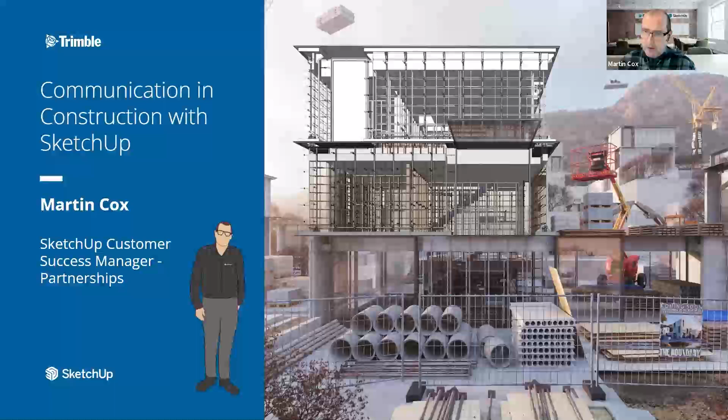So my name is Martin Cox. I'm a customer success manager for our partnerships, and the webinar we're going to be going through is really talking a lot about communication in construction using SketchUp. Now, we're going to be talking about SketchUp, we're going to be talking about other pieces of software, how we communicate with different pieces of software.

There's going to be a lot of information in this webinar. So hopefully, as we go through, it's clear. And also, I'm going to use SketchUp to show some live examples as we go through. So hopefully technology will behave and we get everything as we go through there.

So what I'll be talking about: I'll give a quick introduction. We'll talk about SketchUp, about Trimble, just really more information, what we'll be talking about in the webinar. We'll be discussing why construction is hard. There's so many factors in this, and we'll talk about that as well.

Introducing connected construction, really where we talk about why communication in construction is so important, and then how SketchUp can be a big part of this, and how SketchUp's used. We'll talk about some real life examples, and I'll show some SketchUp models, going into some more details around that communication element.

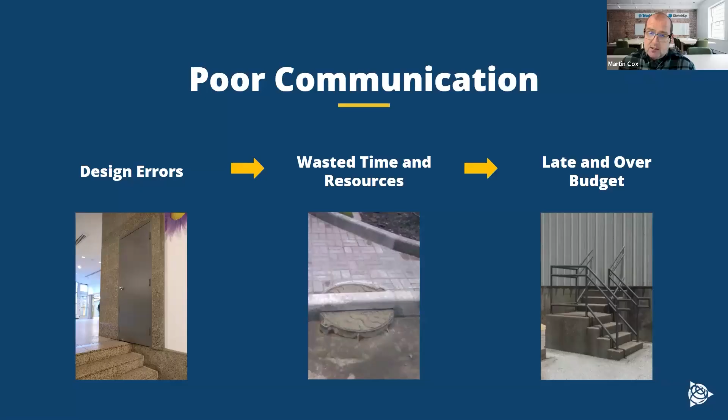So first of all, what is connected construction? Now, with connected construction, we talk about the 3 Cs. These are fundamental building blocks within the construction process that work across the entire Trimble portfolio and also other pieces of software as well. SketchUp is a true collaboration tool, and we'll certainly talk about that. So the 3 Cs in connected construction.

So we have connected. Now, this is breaking down data silos to improve interoperability and document management. The benefit to customers is that all aspects and the different phases of a construction workflow are easily shared, easily discussed, and easily understood. So everyone can work through this as well.

Then we have our content. Streamlining our workflows means that we have our library of data. It's all curated, so it can be traceable. And the benefit from this means that everyone is looking at the same thing. So somebody's not looking at an old version of a drawing and mistakes are made there, and people know where something goes, how it needs to be installed, and the equipment that you have at that time.

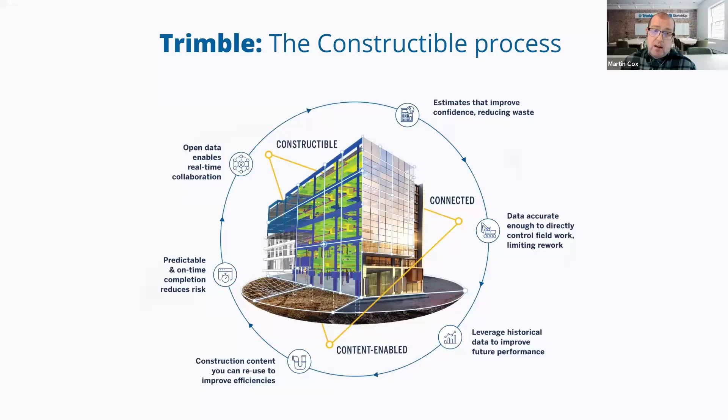So we have proven results around this. We have some huge projects that have worked in connected construction within Trimble, and we've seen a significant improvement in rework, things are executed faster in the field, there's less waste, and just simply the numbers around how many people are connected and how many models are being shared. And we're seeing real changes within that process within construction.

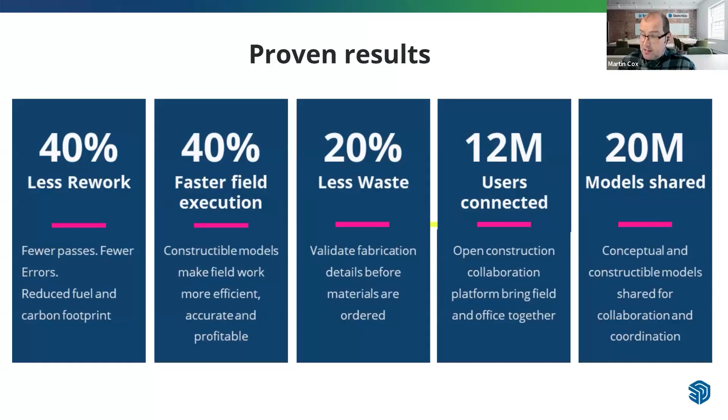Now, where SketchUp sits within this connected construction workflow, and the simple answer to this is in a lot of places. Now, I know this graphic is quite small, and I've seen that there's been some chat. We can make sure slides are shared, and as you know, the recording's going to be shared afterwards, so you'll be able to see these. But we can see this example workflow here.

Where SketchUp sits within this workflow is literally right from the beginning of creating those concept models. The planning within the models, and then we start looking at other pieces of software like AutoCAD and Revit as well. Designing around the models, developing, analyzing those models. We have other pieces of software as well, and visualizing. And then this part of iterating those different versions of the models. Yes, we go around in circles there, lots of changes, but SketchUp sits easily in there as well because we can see fast changes, sharing of those models.

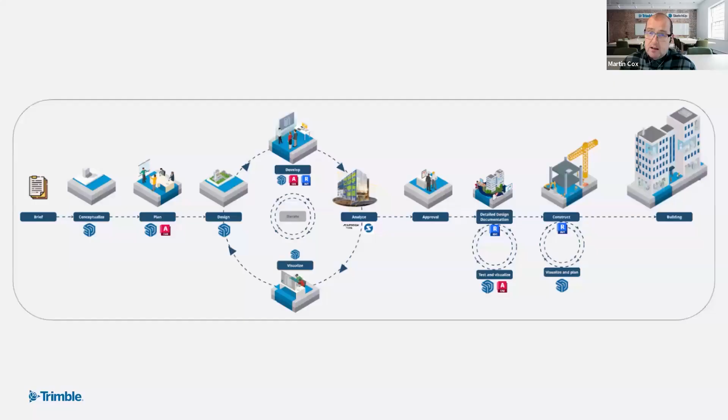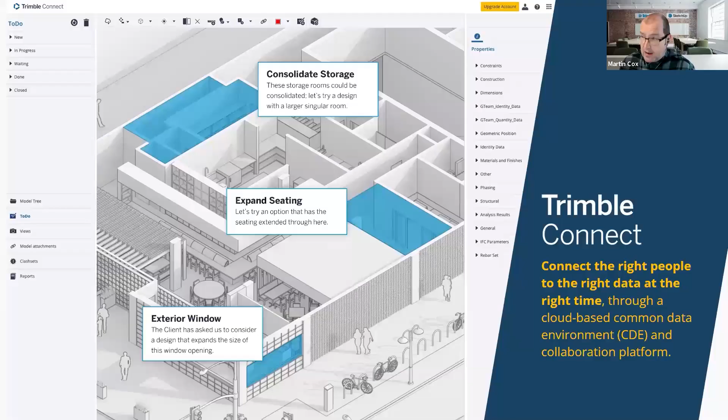And then we have the approvals of the models, full detailed design, and then again we're with Revit and AutoCAD or Tekla Structures and other Tekla Trimble software as well. And then construction phasing and helping within SketchUp the visualization of the planning of construction. So a big part around this as well. And then we end up with our building. But a key part of this is our connected construction. Trimble Connect comes with the SketchUp license, a cloud-based platform that connects the right people and the right data, so everyone has access to this.

Okay. So how does SketchUp really help communicate? So now we're really going to focus in with SketchUp. Now, it's worth mentioning that as I'm talking through the next slides here, and with our example demos as well, we're going to be looking at multiple versions of SketchUp. So there are different levels of SketchUp. We have SketchUp Go, SketchUp Pro, SketchUp Studio, and there's other ones as well. And they have different tools and capabilities.

I'm not going to go into details in this webinar about all these different versions. Best thing to do is talk to your partners, talk to your reseller, and they will find the best fit for you, depending on the workflows that you're looking at for SketchUp. So just be aware that some of the tools, depending on the version of SketchUp you have, you may not have, but I'll try and point them out as we go anyway. But yeah, your partners will be able to help with that and recommend the best fits.

So where does SketchUp sit within that communication workflow, that structure workflow? We understand where SketchUp sits. We know that the majority of users are using SketchUp for visualization. Also presenting ideas and sharing those models as well, and documenting this. And then we start looking more around that model sharing, coordination, whether it's construction sites, estimating, analysis, and then fabrication. So we can really see where the power of SketchUp sits within our different workflows.

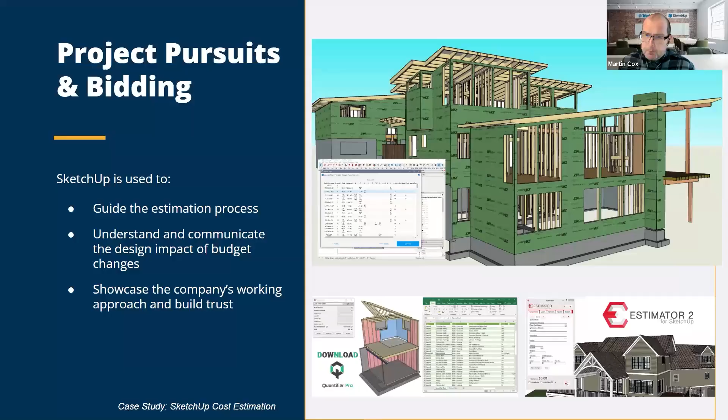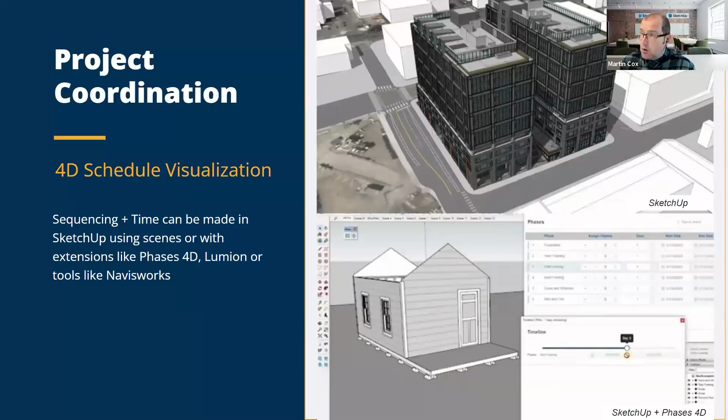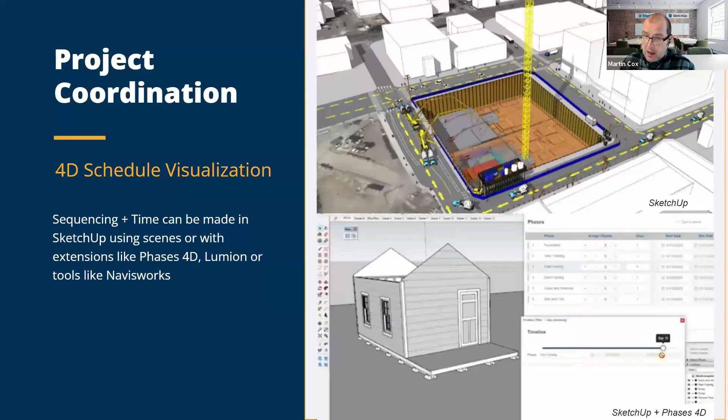There's also that project coordination - the 4D schedule visualizations. With the addition of time, we can create these 4D schedules at different levels. Basic 4D sequences can be created within a planning model to show where the site is going to be, the stages around a site, and where things are accessed. Or you can use different extensions like Phases 4D or Lumion, Navisworks, that actually create some of those schedules as well. That's one area within that coordination.

Another area of project coordination is around site logistic plans. With the complexity of construction projects, creating site logistic plans is standard practice now. Often they can be a static 2D drawing that remains the same, but with SketchUp, these plans can contain full elements around the construction, such as showing delivery routes and locations of where things are going to be.

It's great to be able to communicate the site design to a customer, saying okay, this is where your site is going to be, this is where we're going to put our equipment, this may be where you're going to lose some parking spaces - so this is where the communication comes in.

But understanding those processes also means being able to identify areas where there are potential inefficiencies, areas of concern or conflicts - like we mentioned about timings, saying while the glazing is going up, people cannot work underneath there. So you have that area of glazing, you don't bring in the team to do groundworks underneath the glazing - we can show that. SketchUp is often used in these logistic plans because of its flexibility, and because of 3D Warehouse being able to bring in, say, this is where a crane is going to be, this is where a lorry is going to be.

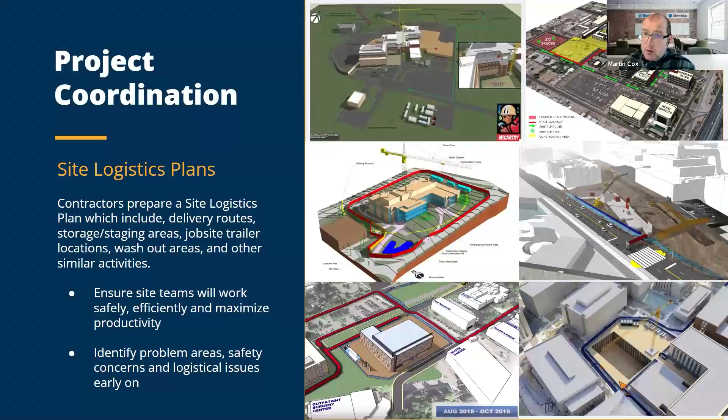Working within those detailed site logistics, you can see how clear it is with our 3D plans. We can show delivery routes, delivery locations, and storage locations, those areas as well, and it really helps with all of those things I mentioned.

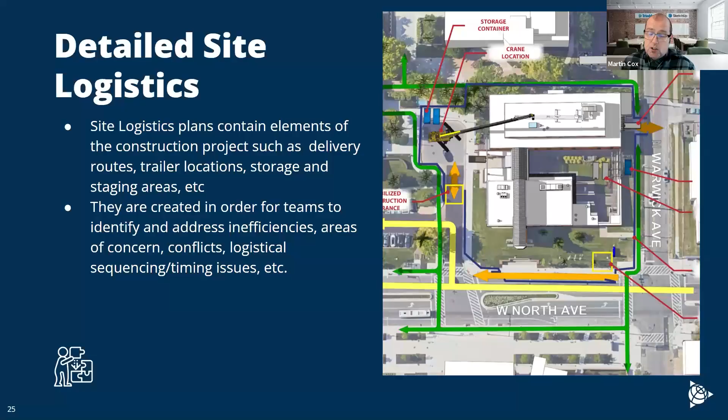So this is a huge and big part of where SketchUp sits within a lot of our construction customers. Now, something else that happens on a regular basis is construction mock-ups.

These are basically showing potential complicated areas, and construction companies spend thousands of pounds, euros, dollars - we're all over the world in this webinar - showing a physical model of how these glazing assemblies are going to go together. They're quite complicated.

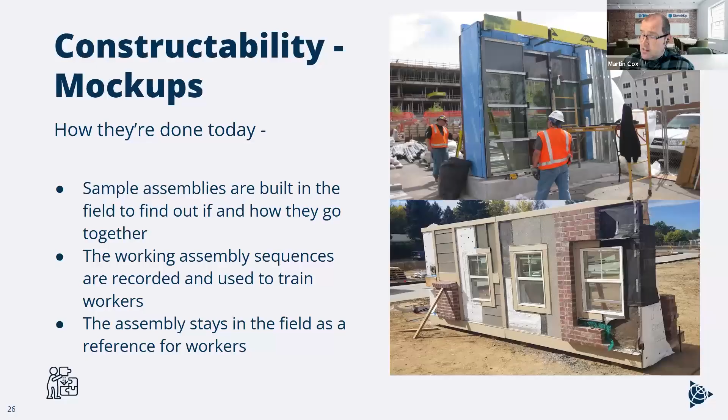The physical mock-up is usually developed before the actual assembly is performed, so the trades can learn how things are put together. That stays on site - it literally sits there so people can come over and have a look at it.

But a big part of this is creating virtual mock-ups. These are created first, even before, so they're created nice and early to assist the assembly processes. During design, models can be exploded.

They can be shown with more detail. Even with the physical models we saw, things can be hidden - they're carefully designed so that they're almost showing those layers. Whereas a virtual mock-up can explode and can be hidden.

So we can show details here that you could never make, like this example, seeing how that sits on top - detail zooming in, with cuts and crops as well.

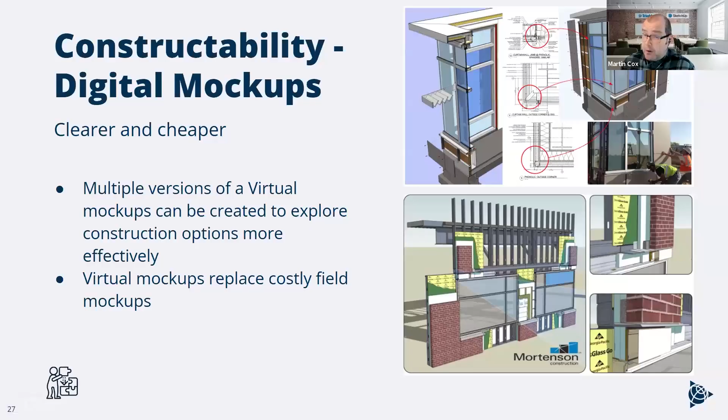And as you can imagine, these are much cheaper to make, and it can go into much more levels of detail. Those three-dimensional details can really show the clarity, so it's more clearly understood on the job site.

And these are all real examples - examples of where we've worked with customers around the world. Okay, so let's get into some actual examples here. Let's start having a look at SketchUp.

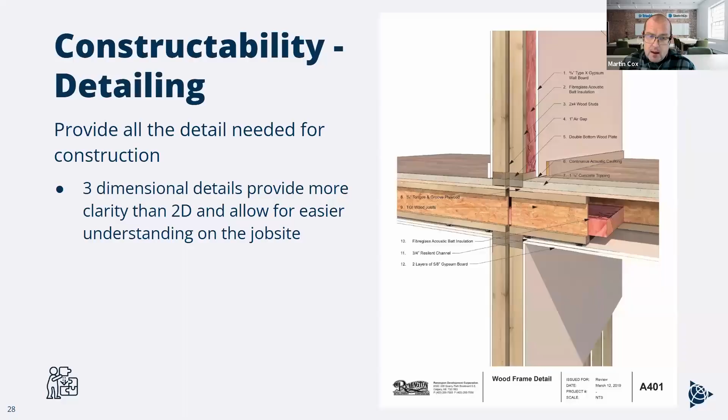Within our workflow and the next example, I'm going to show a video here and talk through these different options. I want to walk you through showing how some of this integration happens. We're looking at using Connect here, using SketchUp right from the beginning of a workflow and seeing how that expands all the way through - from setting up the site, then introducing other tools and seeing how they work within this workflow.

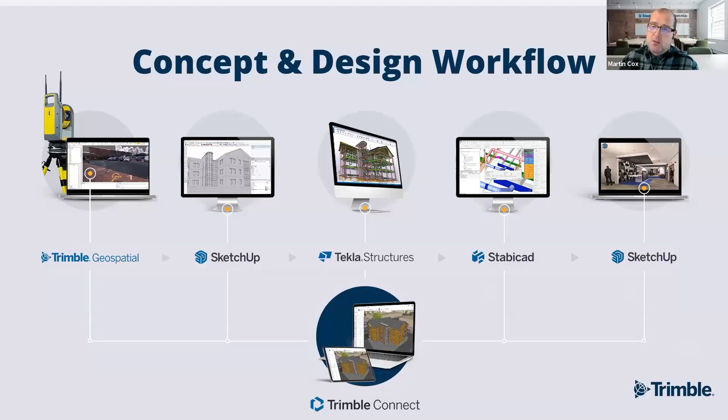So this is a video that I am going to talk through. I may pause it sometimes - I will be completely honest, I don't believe in trying to trick anyone with video editing. The reason this is a video is we're showing a huge amount of information, different tools that I'd be swapping between, and it's much easier using this option.

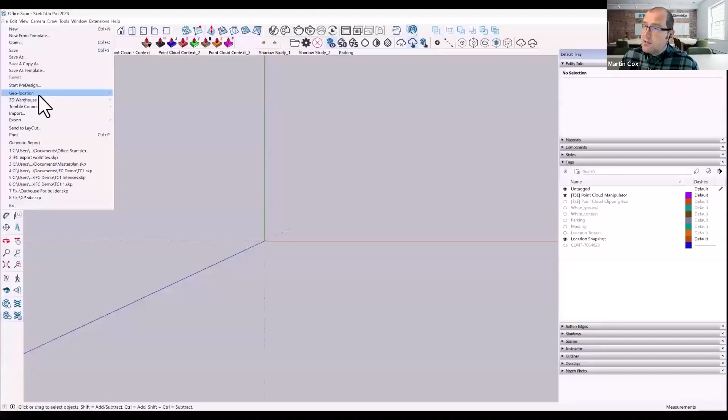So starting right at the beginning, we'll just start this video here. We can literally import the site information using Add Location in SketchUp, so it will be a geolocated model. Using the geolocation Add Location, we can import map data straight away, bringing in this map data for our model. We then have our site plan, and this does contain the tags regarding the terrain - it's not overly bumpy in this area, but it does show that terrain for the model.

This means we can then quickly create a plan just using some quick 3D models. We'll jump to a model here saying okay, this is how our site looks with some models around it. So this gives us an idea - we can look at shadows, we can look at how things are going to be, models and buildings that will be in place, which will help with crane positioning as well.

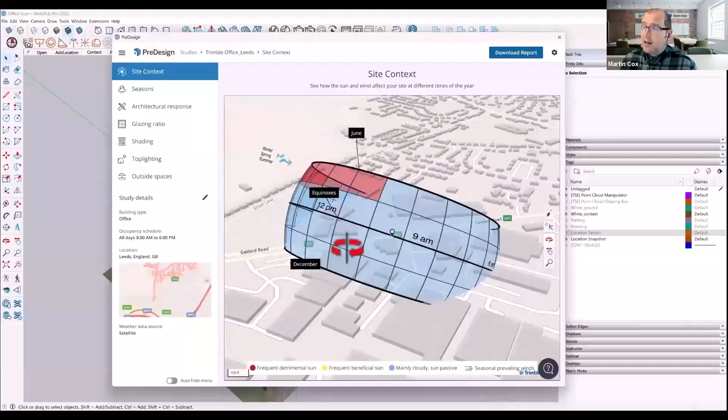Using a tool such as SketchUp Pre-Design, because our model is geolocated, we can use Pre-Design to actually look at sun and weather data, which helps with the construction process, because we can look at historical weather data to see the type of light we're going to get, how much rain we get, and wind conditions for cranes as well. So it gives us a lot of information here. It also goes further into architecture, but we're not going to look at that one.

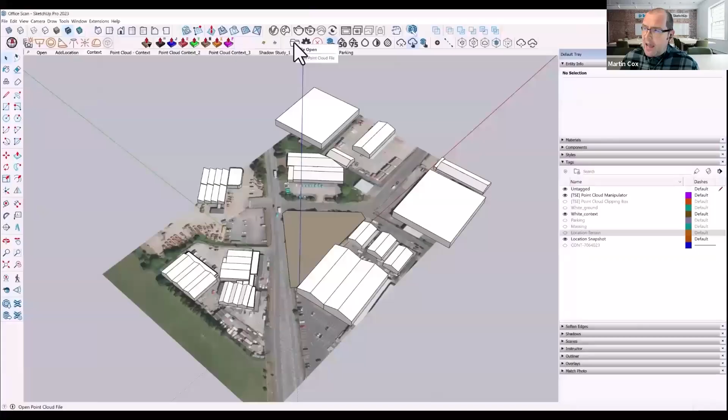Using a scan of the site, so opening this with Scan Essentials, and this is in the different versions of SketchUp. So if you have SketchUp Pro, you won't have Scan Essentials, but we can actually import a point cloud of our site.

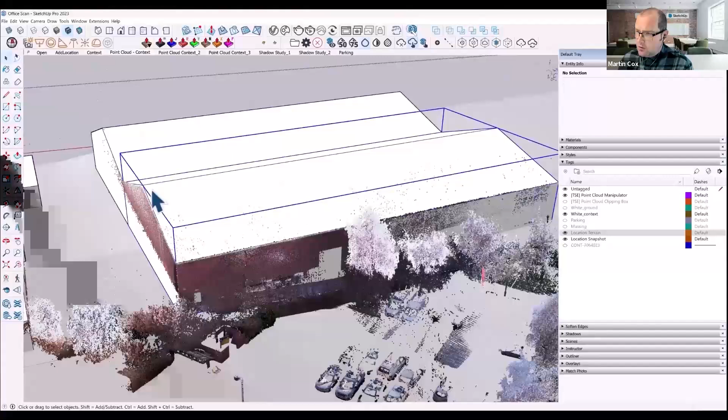So we have a real life scan here using Trimble scanning hardware, and we can actually see the site now with regard to those building conditions around.

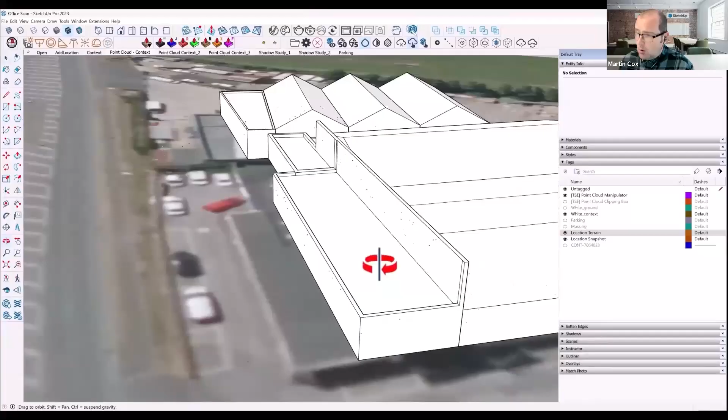We can really start analyzing it and making sure we get these in the right position. Again, particularly important for access and machinery, because we need to know about potential overhangs on site. So we can see here, actually, there's a little bit of a roof that we've possibly modeled a bit lower.

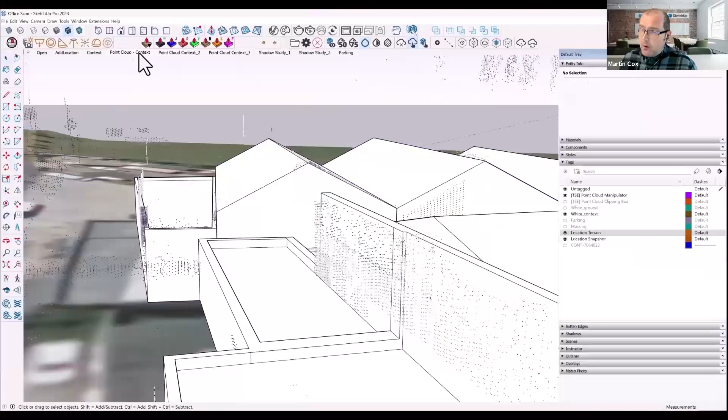So using the SketchUp tools there, we can easily adjust that roof so it fits in with our point cloud. Now, the point cloud is a great reference there, and of course we've got our point cloud available.

It means that we can see trees. It means that we can see, like I said, particularly with deliveries and access around there as well, so we can make sure we're aware of those trees.

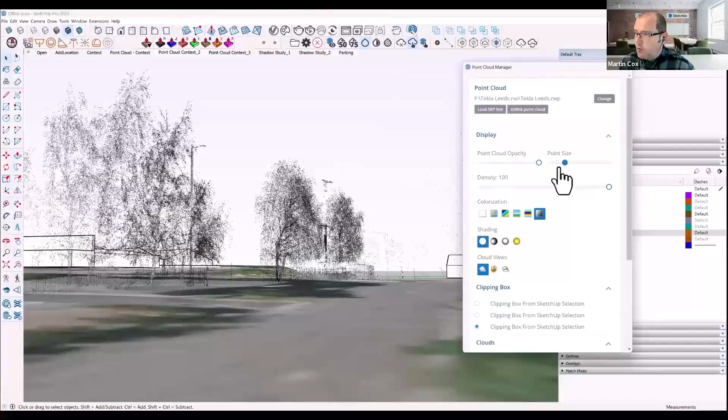But there are a number of other tools within Scan Essentials where we can show things clearer. We can change the point size of our point cloud, but we can also analyze the model, so we can compare the point cloud to our SketchUp model.

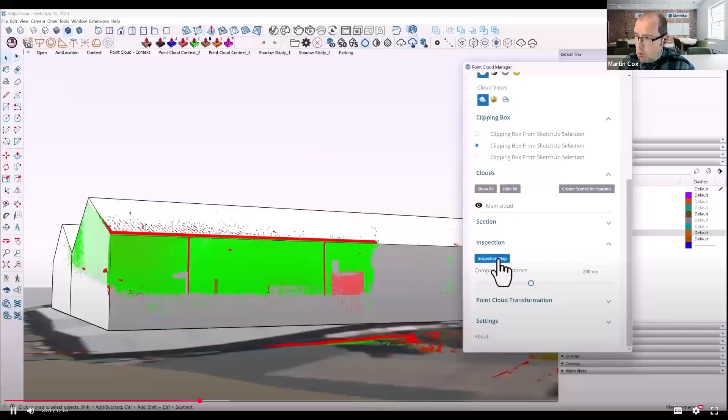So what we're showing here is that using the inspection tool within Scan Essentials, we can actually show if our model is correct. And on here it says 200 millimeters, so that little red area means that our model isn't quite right with the inspection there. But there's a lot of information.

Then we have our site. Using SketchUp, we can now create our concept design for a model. So at the beginning, we're not thinking about how we're actually going to build this. This isn't our full constructible model. This is showing some ideas.

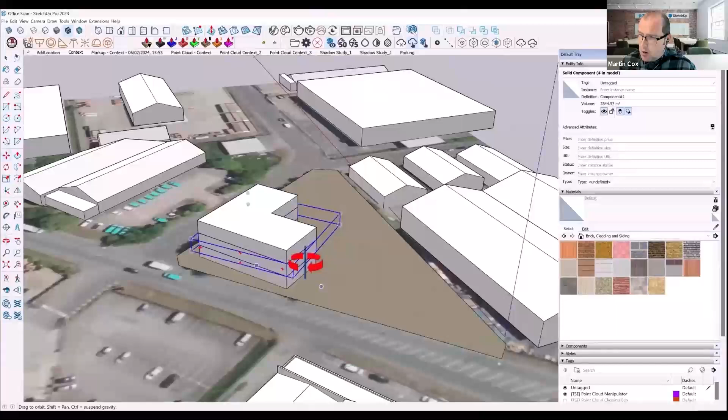So this is a video here showing how quick and easy it can be for SketchUp to create a model to show visually for people, saying, okay, this is our site, this is our plan. What do we think about the idea of the model here?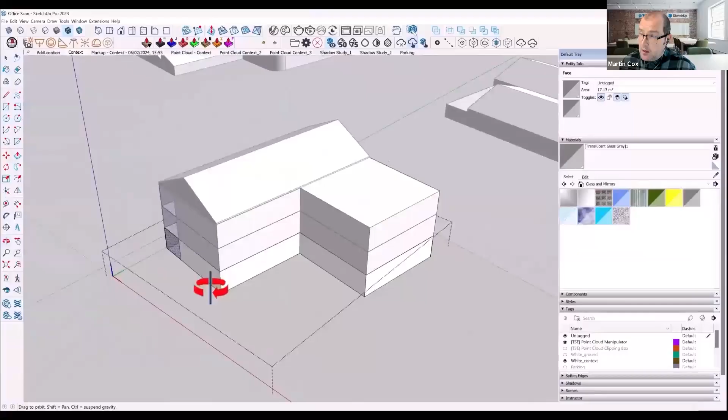We can create simple block models using components. So each of those floors is its own component, so we edit one, it edits all of them.

And we can then say, well, actually, let's put some glazing on the corner here. Let's put some of those brick materials on. And we can place our roof how we want it.

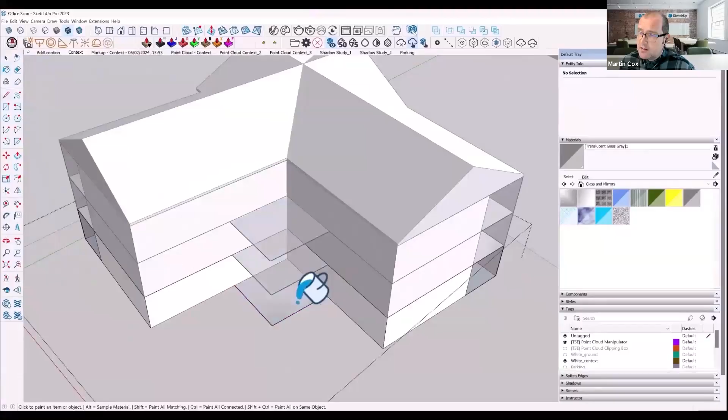Again, just think about how quick and easy it is that we're doing this, but for our customers to be able to say, okay, is this what you're thinking? Let's have a look at our site here. And is this the type of thing you were looking at? So being this fast, this easy to do is tremendously powerful.

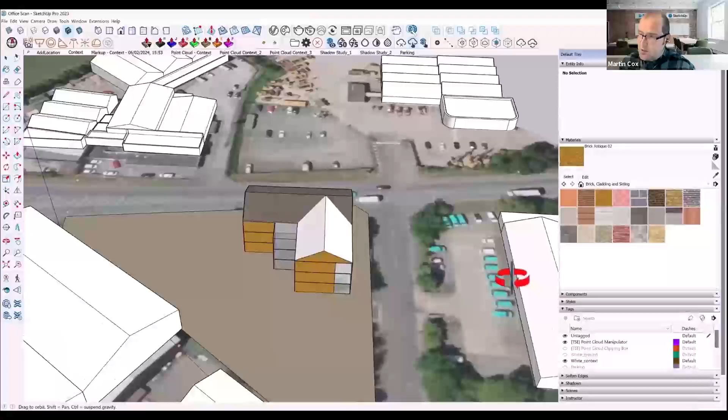And just creating those simple models is great. And then within that planning, we can start thinking about our site there. So we're just finishing up here, combining that with our point cloud. We can see how it sits within existing trees, basically the existing site that is actually there.

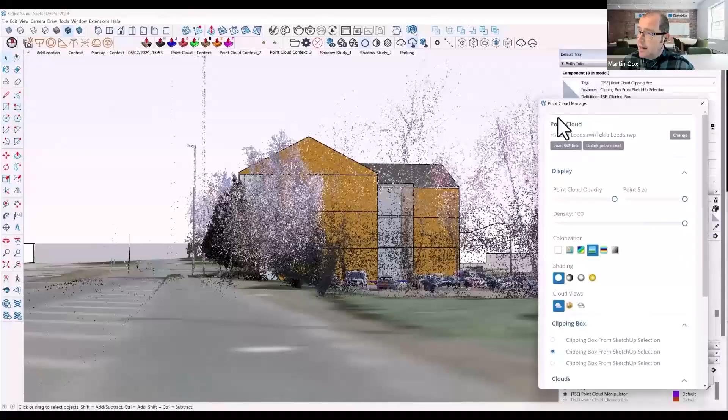With that scan, we can incorporate that. So we need to be aware of those trees, particularly with construction. It's like, right, well, we're not going to put a crane there. So it's being aware of our environment.

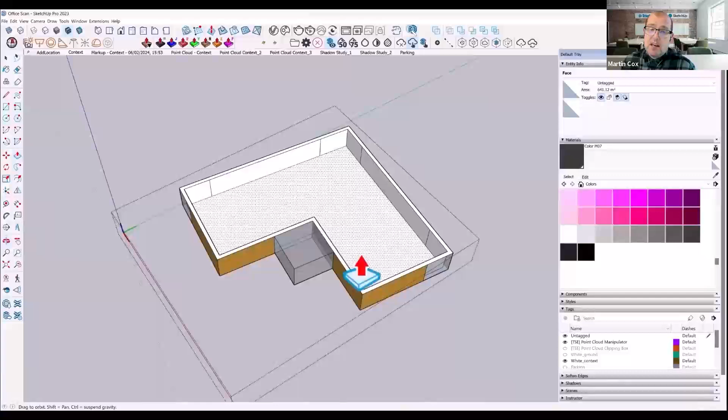And we can also start thinking about that on the interior as well. So it basically takes our model and then those iterations around the model, making sure that we have those.

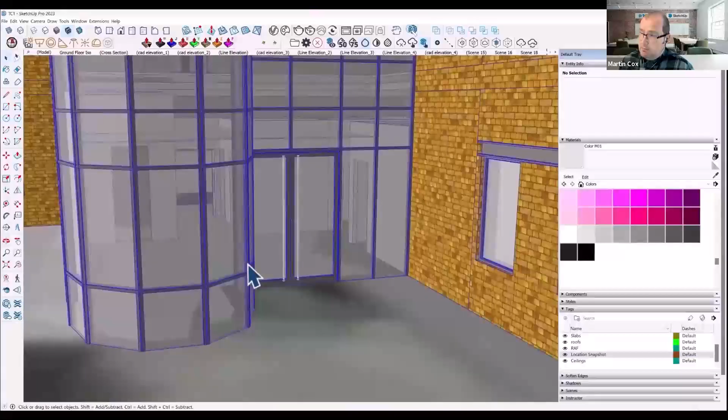So we've got a little further with this. We've added some logos, a little bit more glazing detail. But then bringing that on site, again, just being able to show the details, we can really start saying how it's going to look, with this glazing detail going to be made around the staircase, and a little bit more information about the interior of the buildings.

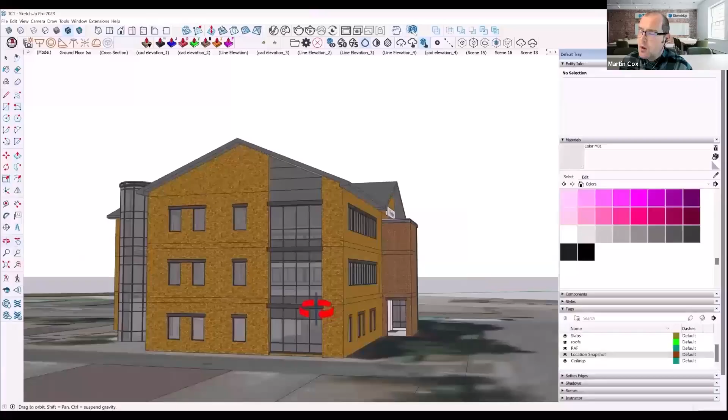So now we're moving into having an architectural model. But taking this, we can again focus on communication around that. We start having our model, we can start putting this into Trimble Connect. We can look at this and then say, okay, well, using the different tools in SketchUp, we can actually have our line elevation models and create our information packs to say, in LayOut, show the drawings and capabilities around here.

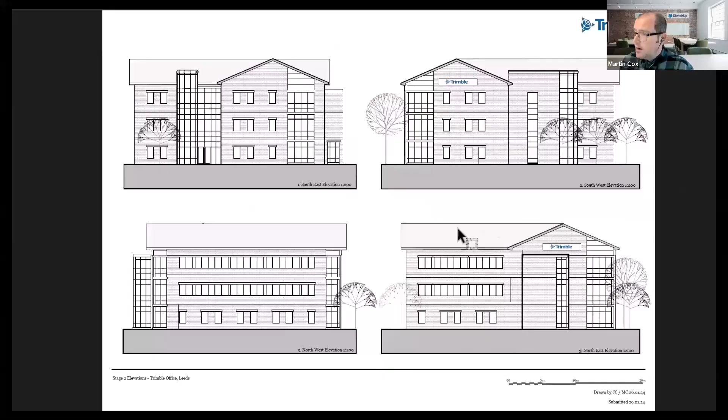So, we're exporting this to LayOut, Trimble Connect in this instance to start with, but then within LayOut, we can have our drawings and at least show people, yep, this is how your model is going to sit. This is the intention of our training rooms, just an idea of how it's going to look. But then we can take it even further with connected construction.

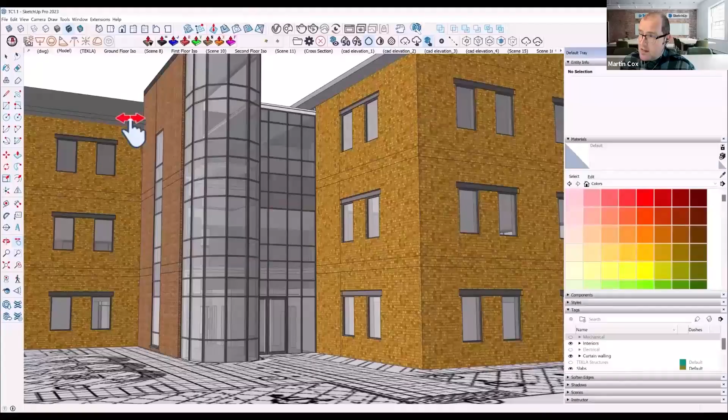So working in SketchUp here at the moment. Inside Trimble Connect, we have the structural models. We have the MEP models, which are the electrical and plumbing models. So, mechanical, electrical and plumbing. So, we have all of the models within Connect. Now, the great thing about this is once they're in Connect, we can then use these within SketchUp.

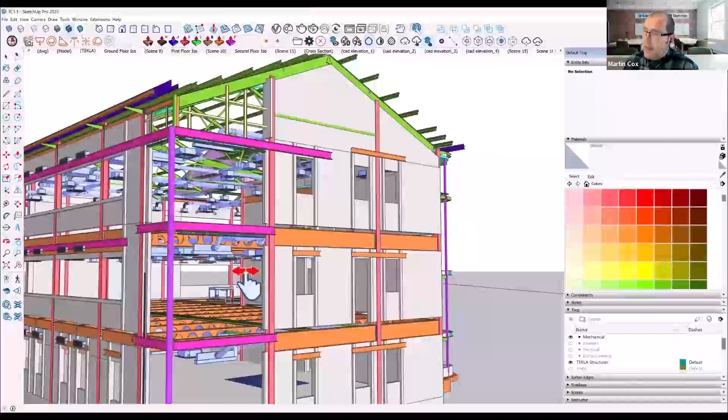So we've imported the Tekla Structures model in SketchUp here, and we can see how that Tekla model looks. But we've also imported the MEP model in here, so we can look at the mechanicals around our ductwork and piping. So we've got our HVAC equipment there. And now we've got our electrical equipment. We can see where actual plug sockets are going to be. And these are real life positions within our model.

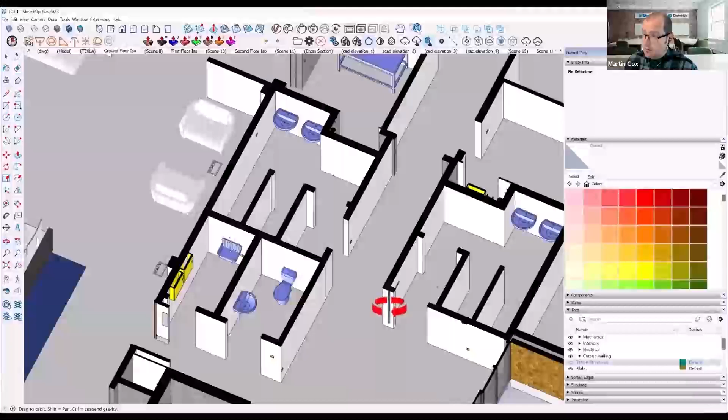So looking at the model now within our architectural model in SketchUp, we can see those correct locations of plumbing. These bathroom accessories aren't from 3D Warehouse. These are actually from the MEP model, which is where they're going to be. The yellow parts, these are the electrical models. So we can see where light sockets, plug sockets, smoke detectors are going to be within the site. So these are the actual locations.

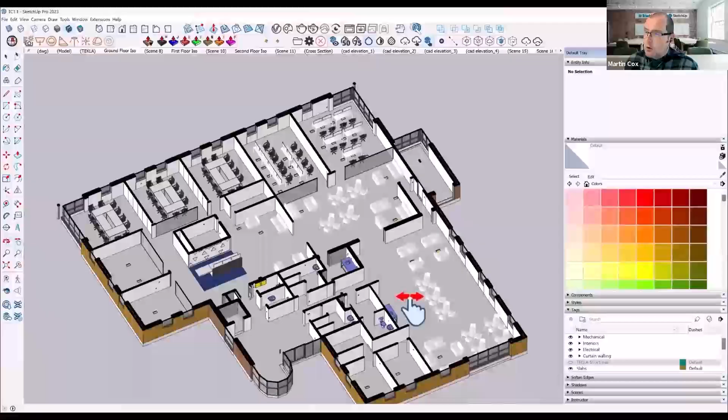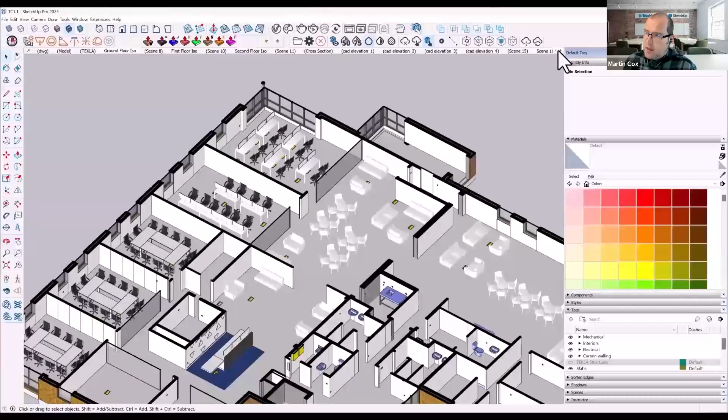So for our training suite that we have in the corner here, we can see those plug sockets in the floor. Are they in the correct locations? So, we have that information. We can see that they're going to be in the right place. Now, this works on multiple things. We can see that we're going to have the plug sockets. This is something we've worked with hospitals on, they really like this because they need to see access around certain things.

But the good thing about this is we've got a design model around here for our reception, but actually that floating light box is sitting directly over the top of an air conditioning unit. So, that's something that needs to be looked at. But within our model, we can actually see there's some exposed steelwork there. It's like, right, yep, we're going to need to box that in. So, we can quickly highlight that.

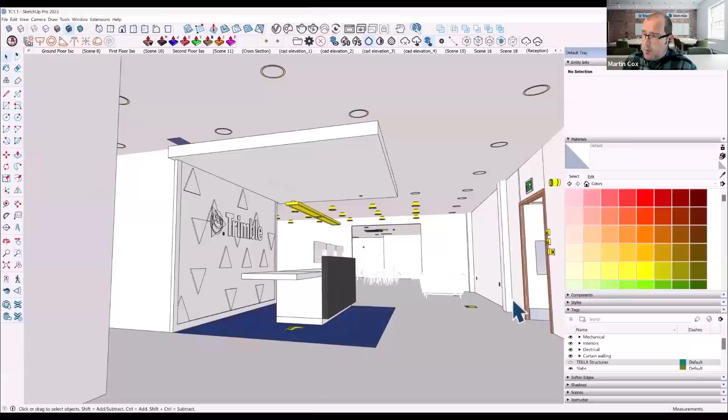In Trimble Connect, we can put that as an information request and say, look, we need to box this in. But we can then also look around everything within there to say, yep, we're making sure we've got all our sockets and information as we go through. And the great thing is because we've got this level of detail model here, we can then actually bring this into V-Ray for SketchUp.

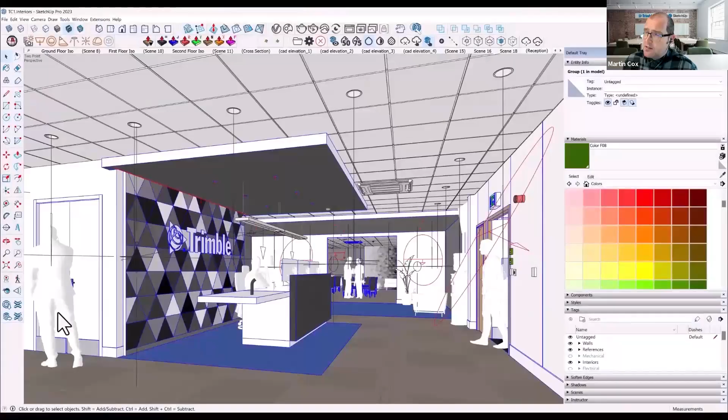So again, in versions of SketchUp, we have V-Ray included, and all of these little lines and circles are actually light information for V-Ray, so we can do a full render to show how it's going to look realistically. So we've got our lighting here. We can see that in this instance, the air conditioning unit has been moved. So we retain that light part there. It's all been boxed in, but we actually have those switches and the fire detectors within our render. So, this is a real life render within our reception.

This can also be useful externally as well, because you're rendering everything. So, we're highlighting here that we've got all of the MEP equipment and the HVAC equipment appearing in our model. When we communicate that, we can show the lighting information. So we've got that lighting detail up the wall on the internals there. But even little details like there's some plant on the roof there. This is something that often catches people out. It's like, oh, I didn't know there was going to be a large unit on the roof.

So actually having this connected construction information shows that model all the way through. And we can see our steelwork through the glazing and that plant equipment on the roof.

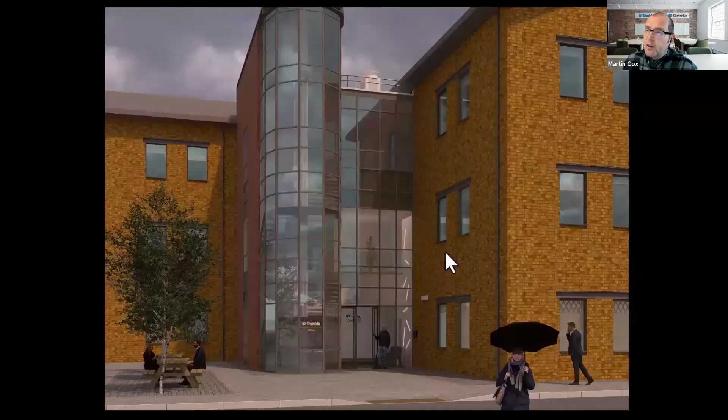And also this model was for Leeds. So of course they're showing somebody with an umbrella, because we're up north a little bit there. So we have that, but this one's sunny there, but we can show those existing trees as part of the rendering. And again, some of that electrical equipment, the ducting above the windows.

Okay. So as you can see, that's a lot of information that we showed there. We looked at Trimble Connect. We looked at Tekla Structures. We looked at Trimble scanning. We looked at MEP, all around the SketchUp model. So our SketchUp model was there all the way through.

And there's other elements, and I just saw a question come in around that air conditioning unit being hidden. In Trimble Connect, there is actually a conflict option. So it will show where models are actually hitting, and there are conflicts within Trimble Connect.

Okay, so I'm going to have a look through here. We're not having a look at that one again. I want to go into SketchUp now. I know we're coming up on time, and I want to make sure there is time for questions. So I'm going to be pretty quick here, showing some of those features in a little bit more detail in SketchUp. So the first one I'm going to show is SketchUp Scan Essentials.

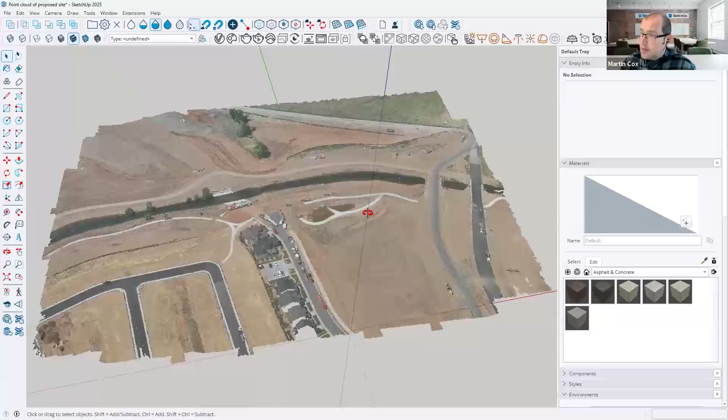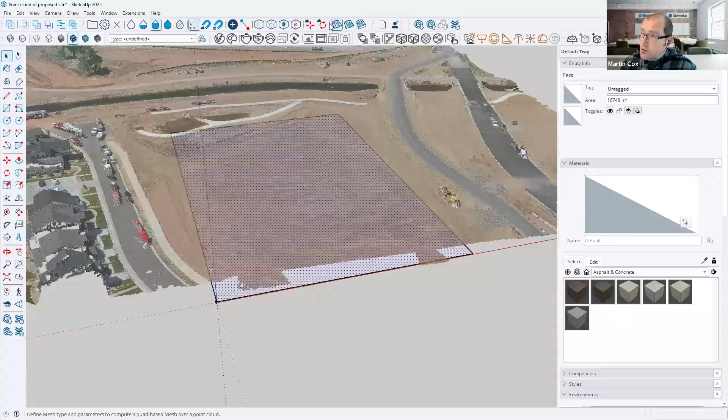So this is my scanned model here, and this is quite a large scan from a drone of a potential site. And the good thing is, using some of those tools, this isn't just a dummy model. I can actually take my site and quickly add a rectangle of the area that we're going to be constructing, select that square I've just drawn, and using the tools within Scan Essentials, I can create a ground mesh. This creates a full surface of that particular area that I can then work with in SketchUp.

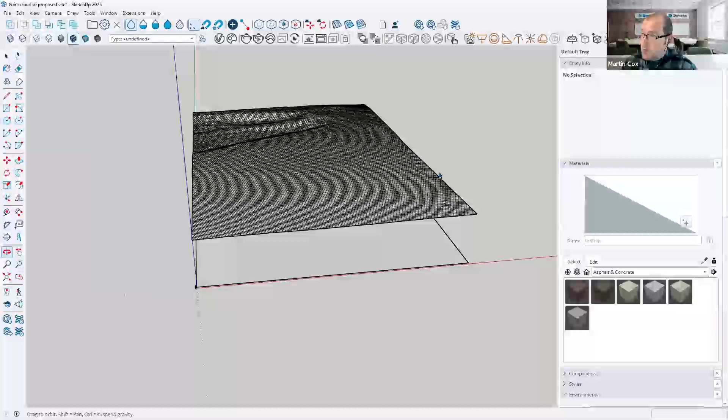So I've now got my ground mesh. If I just hide that point cloud, I can see I've now got that ground mesh that I can work with. I can select my ground mesh and turn that into a solid as well. Again, these are in the Scan Essentials tools. So we can see we have that model there to work with. Now, there are other things we can do. We can cut out the area that we're going to be working, and you can actually analyze the area to see how much soil movement there's going to be.

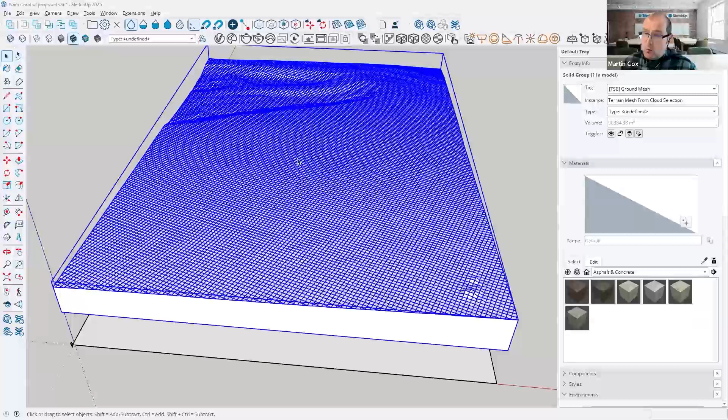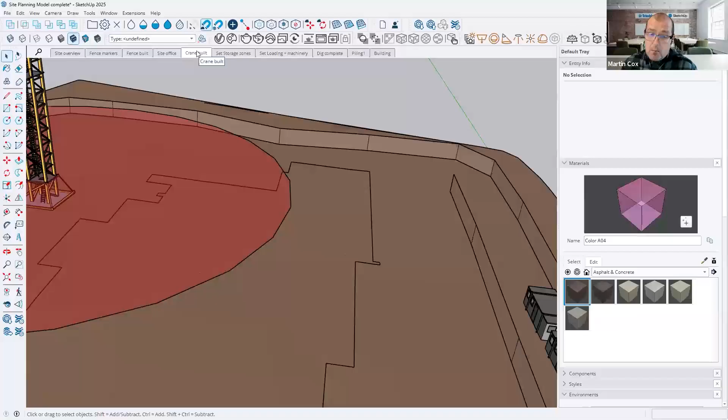But within our site planning model here, I've got that area, the solid, I've sketched on the area, and we can go through step by step to say, okay, this is where the fence markers need to be for the site, the site office using models from the 3D Warehouse, and the crane position of our model.

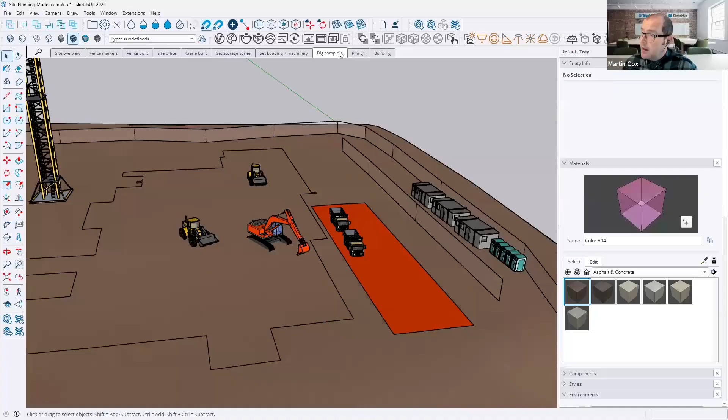The storage zones that we can specify to say this is where our materials are going to be stored. The loading areas, using our 3D Warehouse models, of where the machinery is going to be. And we can even start putting a little more information in, such as the dig that we're going to have there. And using a Tekla Structures model, we can show the building. So this is a simple example, taking our Scan Essentials site model and bringing that through.

Now, if I go back to our dig on this one, another example of where SketchUp is used quite a lot is showing where health and safety equipment is needed. So that's a big part there as well.

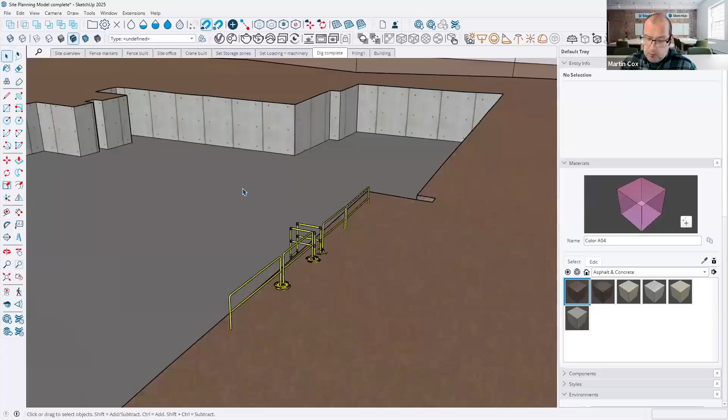Okay. Now I'm going to show a slightly more detailed model, as an example of how we can take this a little bit further. Now, this is a great looking model. Already it looks like I'm looking at a render, but we're using the new SketchUp 2025 environment and materials. So we can see that's how the model looks in that instance.

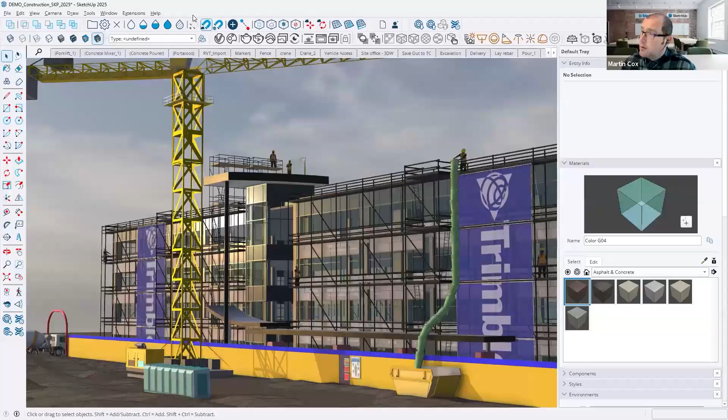Now, I'm going to go right back to the beginning here, because I saw a question come in around working with and collaborating with other models. So what we've got here is a Revit import. This is using the Revit Importer that we have in SketchUp, again in different versions of SketchUp. So we have the Revit there.

So we've got our model, and we can then have a look at that site, using our overlays here within our styles. The styles that we set up here, we can set those and set the edits and have our watermark over the top. So this is how this is done. A lot of people think, how are we doing that? But that's a PNG watermark over the top.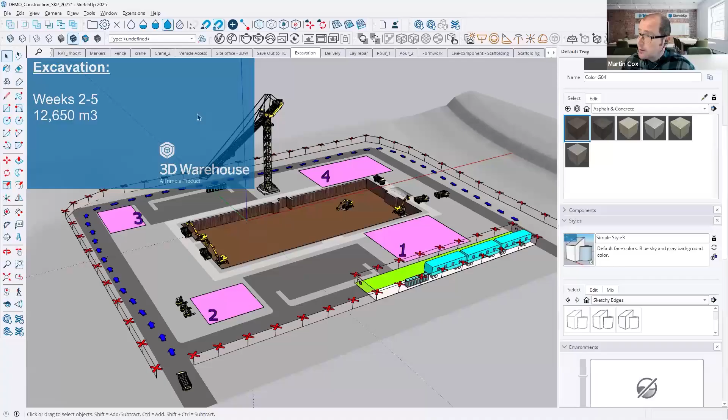So we have our excavation of our site. We look at our loading zones. And then we can really look at the deliveries. We can control with the arrows specifying direction of movement around the site. Now, using scenes and different transitions here, we can start creating some quite cool effects to say, okay, the rebar is going to be laid in that week.

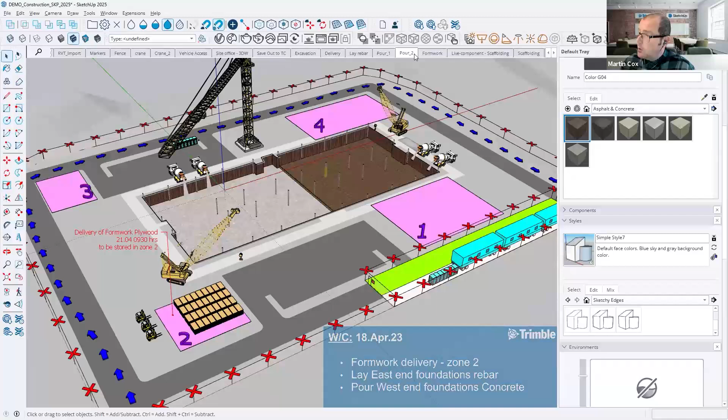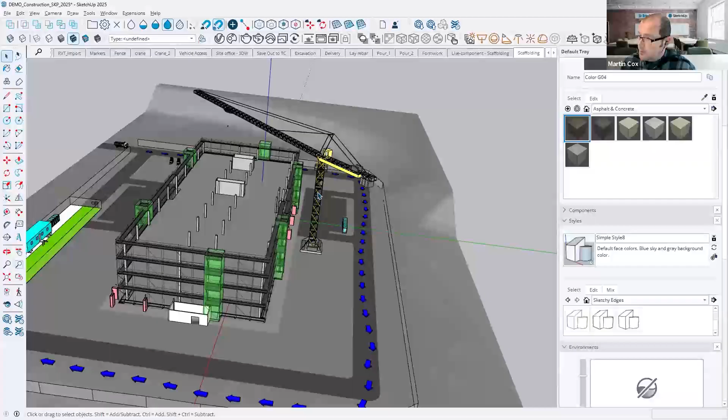Then we start doing the pour, so more rebar. We have the cement pour there. Then we've got the second part of the pour, and lovely fun little details of the concrete coming out of the trucks there. The formwork's going to go in within our pour, and then we start putting up our scaffolding, and we can have our scaffolding zones, and label those to say that these are the staircases that we're going to be having.

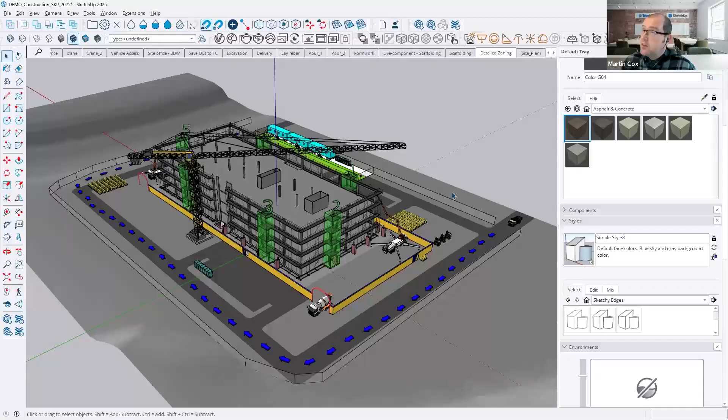Labeling those staircases with our detailed zoning, it's simply being able to say staircase 3 is going to be out of action at these particular times. And we're still using the Revit model. Because we're using the Revit importer, it recognizes the layers, so we can switch things off, such as walls and glazing there as well.

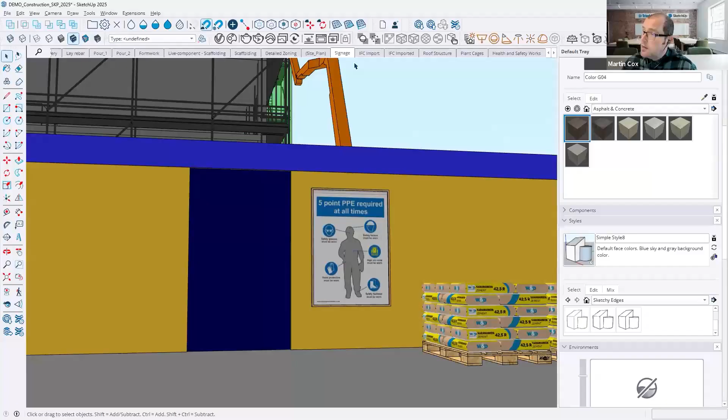We can start really sharing site plans around this, and people can start marking those. The signage that's going to be required on site, we can specify those requirements for sites. Within Trimble Connect, you can link PDFs to those particular signs and say, this is what we need to be loading. We can import more IFC files.

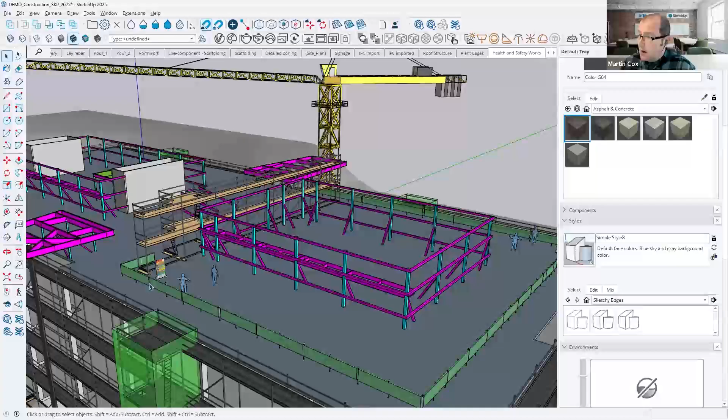This time we're importing a Tekla Structures model to show that we have our roofing steelwork there as well. And we can see our roof structure, the plant cages that are going to be assembled on site, the health and safety that we're going to be looking at, more signage, and this is something we see a lot as well, little 3D models that show that you need full harnessing if you're going to be working on a roof.

Lots more drawings, visualizations here. And then we can get back to our visual model that we looked at. So I wanted to talk through that pretty quickly there as well. Okay. Right. I know I've covered a lot there. I want to move on to questions, because I know a lot of questions have come in and I've got 10 minutes to answer as many as I can.

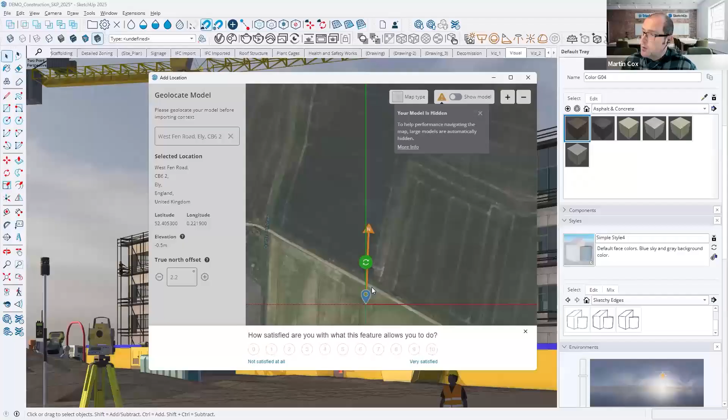So let's have a look as we go through. Is it possible in SketchUp Pro to set project north and site north coordinates? As we saw at the beginning, when you use add location, we can set that up. I'll just bring that across to that screen. We can actually geolocate our model. Sorry, it's hidden, that's because it's a large model. That's fine. So I can choose where I want this model to be geolocated within our site, the actual location of that model, and that will then have that coordinate system there.

A couple of people have asked about the generate report feature. So if we go within file here, and I turn that off. Generate report. See, that was just complete blindness on my part. So generate report there. This is how you would set up and generate those reports. It will create a number of settings. It's just loading up our settings because, again, it's looking at quite a large model here. So that's just loading up the report generator.

And you can already see that there are a number of reports in here, like concrete volume. So there's a report that's been created, and we can then export those reports in spreadsheets, component quantities reports, and I can run those. I'm not going to do that now because it will just take a little bit of time. But that's how to create new templates, new reports, and you can start creating things like bill of materials, which I saw there was another question around as well. It will utilize components, and it will show you how many of these particular components and the area around that. There's a number of reports there.

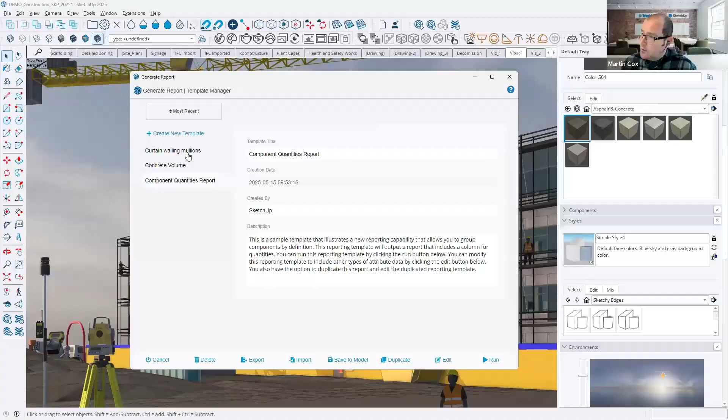If I edit a particular report, like the Curtain walling mullions report here, we can see this is how it's created within the attributes of the models, and then it actually will create and export that report. So, very powerful tool that not everyone sort of knows about. So, okay.

So yeah, people have mentioned translating work they do in other pieces of software such as Revit and ArchiCAD. IFC, so when you import IFC models like from ArchiCAD, then it will recognize IFC capabilities there. We've done a lot of work on IFC compatibility around SketchUp, so it makes sure it's recognizing the IFC metadata and component metadata there as well. I mentioned the Revit Importer, so we have that direct Revit import to get your model in SketchUp, so you can work through there as well.

Okay. Do you have any documentation, Trimble Connect, CAD? So if that's information around how to use different 2D drawings in Trimble Connect, yes, there's help around that. Is SketchUp compatible with Mac? Yes, it is. Now, there are some aspects, if you look at SketchUp Studio, that are not really aimed at Mac, like V-Ray and the Revit Importer. But SketchUp Pro is definitely used on Mac as well.

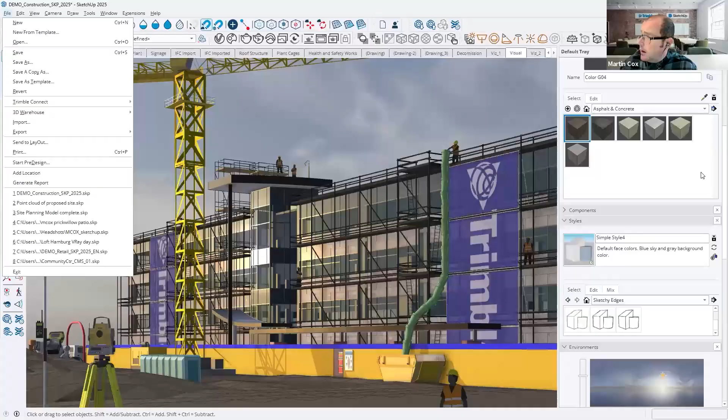So, yeah, a few people have asked regarding import of Revit. Revit import, and it really is as simple as just saying import and searching for the Revit model, and that will come across. And like I said, within a Revit model, in those tags, I'm trying to open too many things in this model here because I try to be as quick as possible. So within the Revit model, it's recognizing the walls, the structural columns, roofs and floors and doors and curtain walls, it actually recognizes those models as well.

Can you learn SketchUp by yourself? Yes, there are lots of free courses. To be honest, if you search SketchUp learning on YouTube, there are thousands of YouTube videos. How often is SketchUp used as a site planning tool? Significantly, hundreds of construction companies are using it. How is it traditionally done? Often with 2D drawings that get out of date very quickly and weekly planning meetings to discuss what things are going to be closed that week. So, yeah. Okay. There are lots more questions.

Actually, two people asked the same question, and I'm going to very quickly show that. SketchUp import DWG files from AutoCAD. Yep, file, import. And you'll see that SketchUp was designed around being collaborative. And we can see so many different files, AutoCAD DWG files, bring those in, tidy them up, and actually use them for extruding walls and things like that.

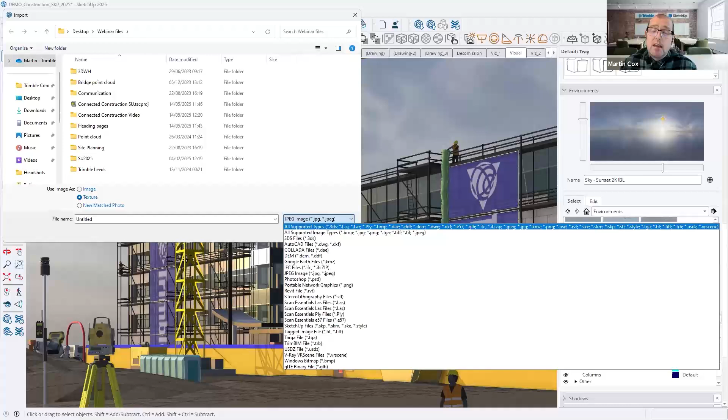Okay, language, yes, different languages are set up in here. The version of SketchUp I'm using today is SketchUp Studio. So SketchUp Studio has the Revit Importer, it has the point clouds, so you'll see the menus. I've got the Revit menu here, I have the Scan Essentials or point cloud menus here, and I also have the Revit Importer as well.